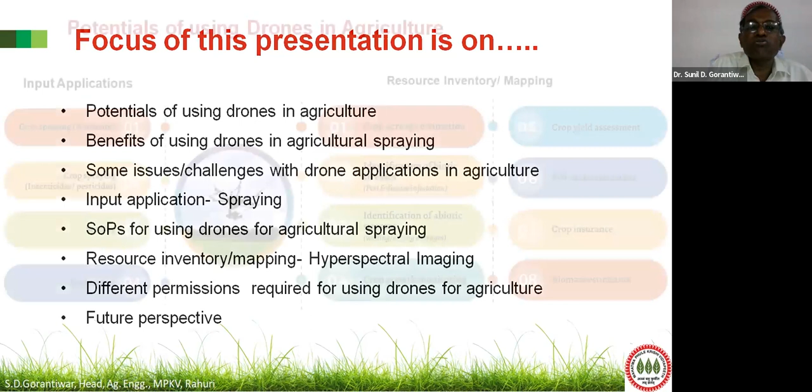Potentials of using drones in agriculture: as has already been pointed out by our founders, drones are being widely used in various sectors of development, and agriculture is no exception. Generally, whenever there is advanced technology, it is first used in other sectors, say transportation, navigation, or automobile industries, and agriculture is almost the last sector to adopt such applications. But in case of drones, we have started application in several sectors, and parallelly we have started applications of drones in agriculture.

This is primarily because of government encouragement and government initiatives for using drones in agriculture. There is one target set up by the government that maybe in the next 10 years, 2 lakh drones will be used for different operations in agriculture.

I have categorized the application of drones for agriculture into 2 kinds. One, we can apply several inputs with the help of drones in agriculture. And another application is we can make resource inventory and mapping by using drones in agriculture or farming.

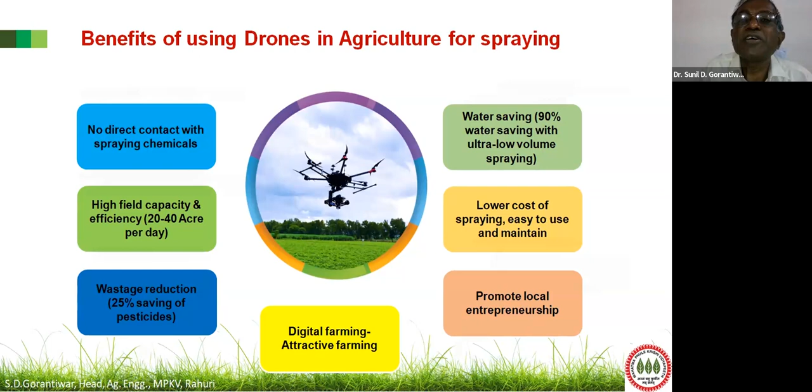So these are certain benefits of using drones for agriculture spraying, and agriculture spraying in general. But at the same time, there are certain limitations as well, because drone is a new technology. Whenever new technology comes into use for agriculture, there are several challenges, because agriculture is a very complex and heterogeneous system.

So it is not just like the industry system, which is governed by rules, but agriculture is very complex. The first limitation is flight time and range, because we have to use the drone in the rural area as far as its applications are concerned. Then its range could be a problem.

Flight time, in the sense that with the current level of technology and battery life, for spraying the drone can be in the air for about 10 minutes only. So we have to perform the operations within 10 minutes, then bring the drone down and change the batteries. So we have to do all these kinds of things. Currently there is this limitation, but now petrol operated and hybrid drones and some efficient battery systems are coming, and maybe this flight time can be increased.

But anyway, in one flight time of the battery, we can cover up to 2 acres of area, and farmers are satisfied with this. Life cycle of the battery is also currently an issue. With the current level of technology, the battery time is up to 20 to 30 minutes.

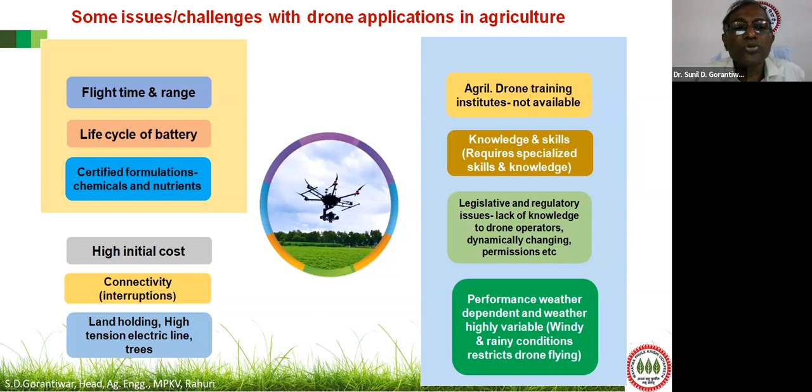Another thing is that weather could be an issue, because when spraying is concerned, we cannot use the drone in certain conditions. We have already prepared a standard operating procedure for guidance to farmers. We cannot use the drone all around the day because we cannot perform spraying in rainy conditions. At the same time, if there is high wind or high temperature, using the drone is also a limitation. But anyway, these are the issues and challenges, and we are in the process of addressing all of them.

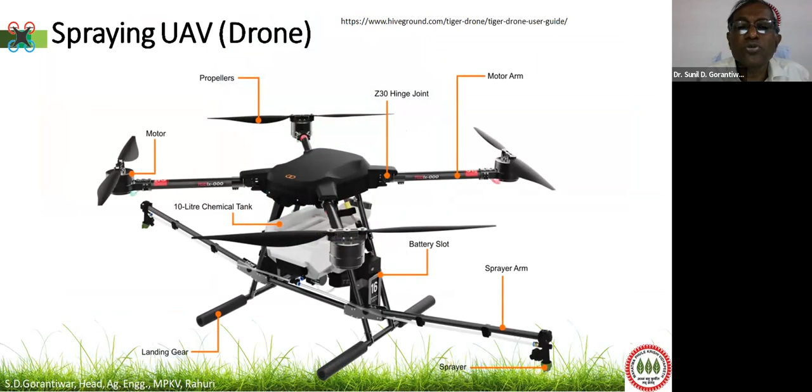As far as input application is concerned, for spraying we normally use this type of drone, which is a quadcopter or hexacopter, having a total load capacity of 25 kg. With this kind of drone, if we want to use it for agricultural spraying, there are 8 steps that we need to perform.

First, we need to calibrate for GPS, then do pre-flight checks, then flight planning. I have shown this pictorially as well here. GPS calibration, pre-flight checks, then we have to perform flight planning, that is mark the area and all those things. Then we have to fill the input, that is chemical and water.

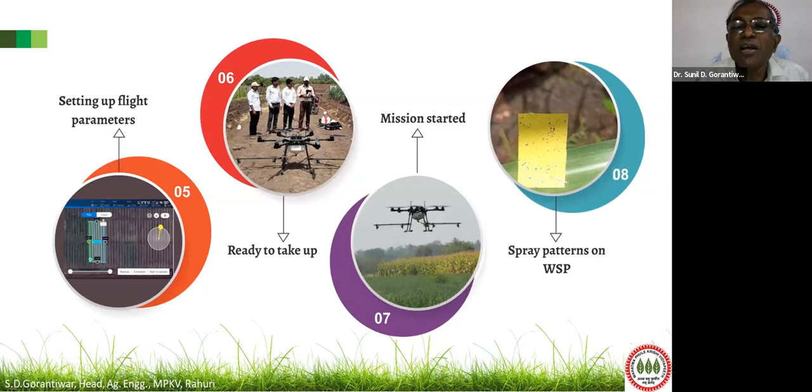Then setting up the flight parameters in the sense of drone speed, height of the drone above the canopy, and the swath width and all those things. Once this is done, the drone is ready to fly. After the spraying is over, if we want to measure the efficiency of the drone spraying, we can measure that by installing certain water sensitive papers and by doing certain operations.

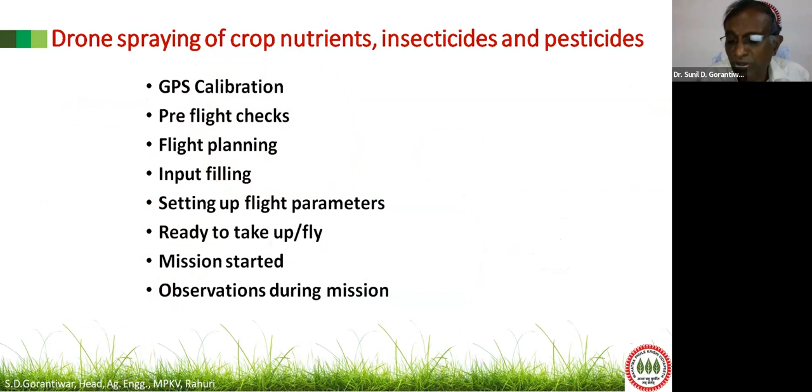So these are the 8 steps. Currently we find there are so many steps, but the experts don't really bother about this. Even if we do certain tractor operations, we have to perform these many steps. With the drone also we have to perform these, and though it appears something clumsy at this time, once the experts start using it, they become quite well conversant with it.

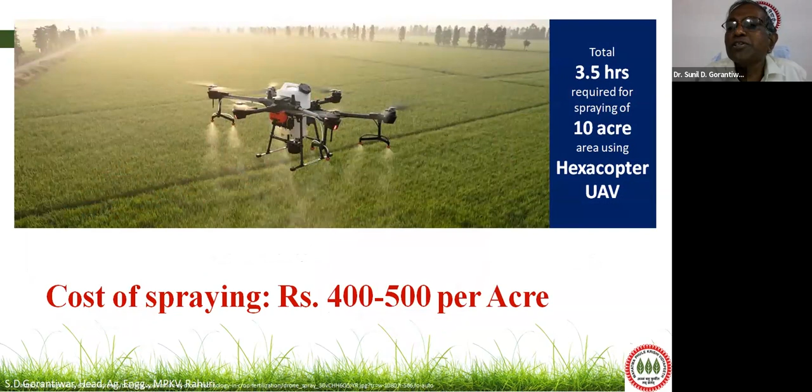With all these 8 operations together, we can cover up to 10 acres of the area in 3.5 hours. We have developed the protocol for this using a hexacopter drone, and the cost of this drone spraying comes to 400 to 500 rupees per acre.

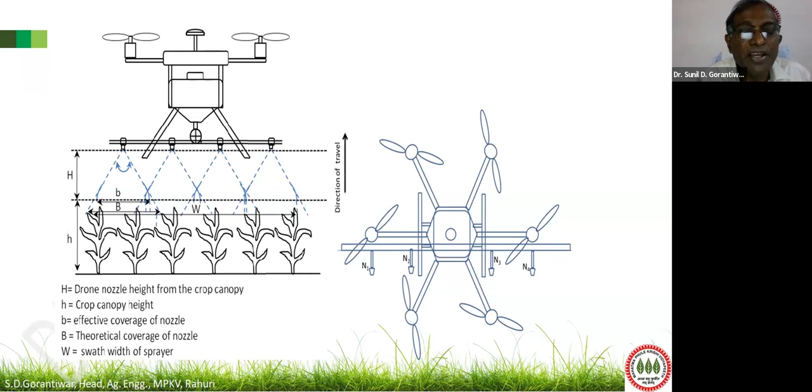Then there are certain drone spraying operating parameters. What should be the nozzle? What are the number of nozzles on the spraying boom? Where to mount them, whether below the motor or on the boom? All these things we have standardized, and based on this we have also developed the standard operating procedure, which involves the type of nozzles, number of nozzles, mounting of nozzles, discharge of nozzles, swath of flying, height of the drone above the crop canopy, and drone speed.

So a few of those drone operating parameters I have mentioned. The type of nozzles need to be anti-drift flat fan. The nozzle discharge should be in a range of 0.3 to 0.6 liter per minute. Nozzle angle 60 to 120. We have to use 2 to 3 kg per centimeter square pressure.

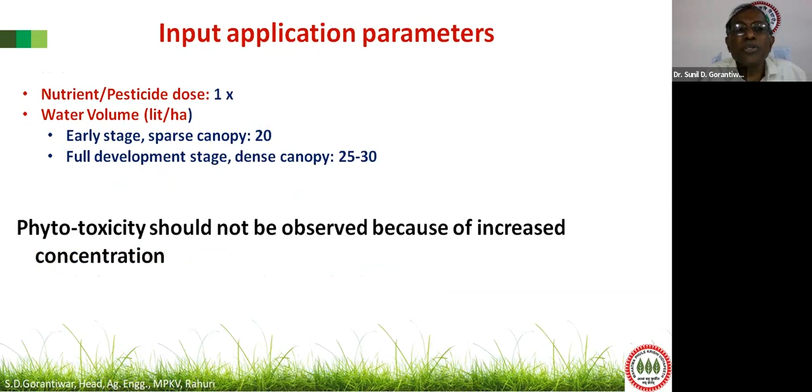Then, regarding water to be used: for early stage, we can use 20 liters of water per hectare. For development stage, we need to use 25 to 30 liters per hectare. So these are all the SOPs, which have already been published, but in summary I wanted to inform about these SOPs.

As far as environmental parameters are concerned, we advise that during summer season we should operate the drone from 6 a.m. to 10 a.m. and then during afternoon hours from 3 p.m. to 6 p.m., and during winter 8 to 11 and 2 p.m. to 5 p.m. So all those are standardized.

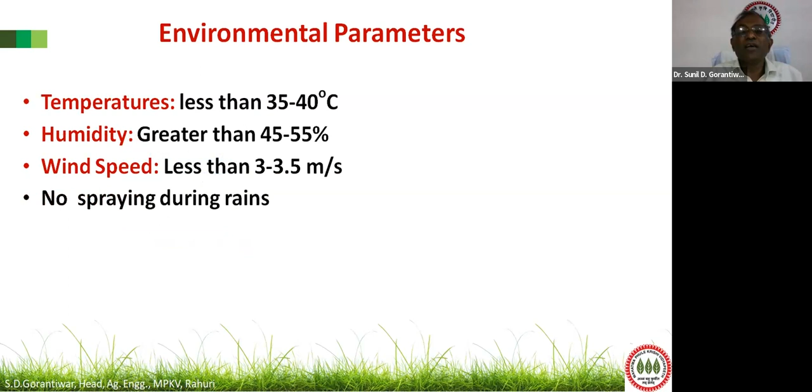Temperature should be in the range of 35 to 40, not more than that. Humidity should be greater than 45 to 55. Wind speed should be less than 3 to 3.5 meters per second. This is very important as far as efficient operations are concerned.

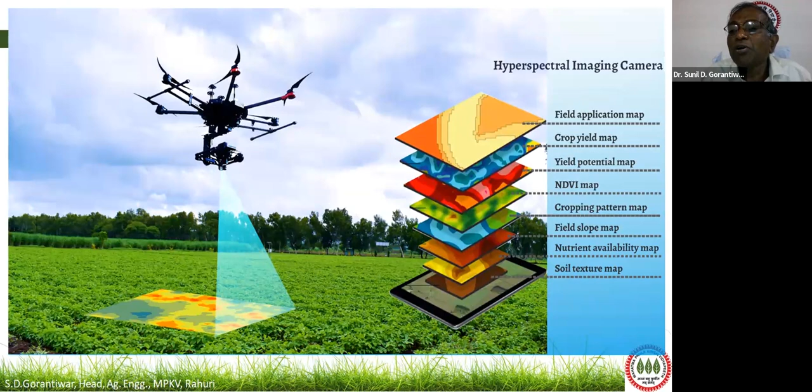Similarly, we can use the drone for different kinds of mapping, which I have indicated here: field application, crop yield, yield potential, NDVI, crop pattern, and all those things. These are the several kinds of cameras - thermal sensor, 3D LiDAR sensor, hyperspectral imaging sensor - that we can mount on the drone. Just as there were 8 steps for using drones for spraying, there are 10 steps for using drones for mapping: flight planning, setting up the flight.

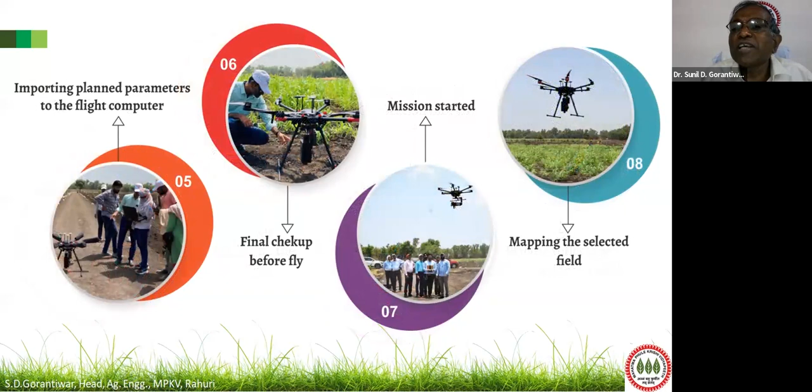Then we need the magnetometric calibration, placing a reflectance sheet, because whenever there is a camera, we have to have a certain target and reference. Then other flight parameters, which are similar, and after that we have to perform certain kinds of analysis once we get the drone image with the help of the drone. So these are, in short, the two applications.

Then we need several kinds of permissions for the drones. These are different for different types of drones: nano, micro, small, medium, and large.

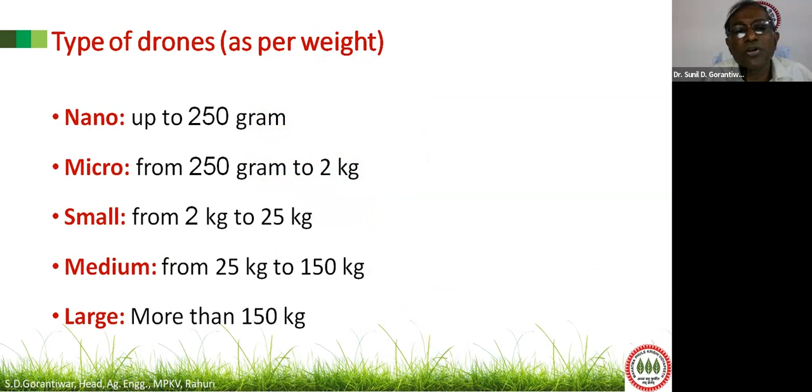As far as agriculture is concerned, we normally use small drones, having 2 kg to 25 kg weight. And for that, we have to ensure that we are operating the drone in the green zone or yellow zone with permission, which is available on the government's digital sky map.

That is available on the website. The drone should already have the type certificate by DGCA. Then the user should also obtain the unique identification number for the drone before flying. And the drone operator must have the drone flight license from the authorized RPTO, that is the Remote Pilot Training Organization, authorized by DGCA. So these are 4 kinds of permissions which we should know.

Mahatma Phule Krishi Vidyapeeth, Rahuri is the first agriculture university to be awarded with the Remote Pilot Training Organization status by DGCA. So we are continuously training farmers and participants on drone flying, and at the same time using drones for agriculture. We also provide guidance on how to obtain the type certificate, UIN, and how to locate whether your farm is in the green, yellow, or red zone.

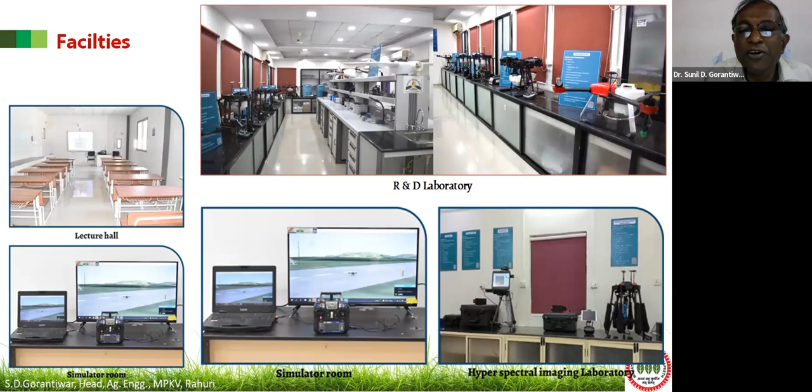I'll skip these slides, there are procedures for this purpose. We have facilities, as already told by our founders, of 38 different kinds of drones for spraying, and we have simulators and other things to provide training for the drone pilots.

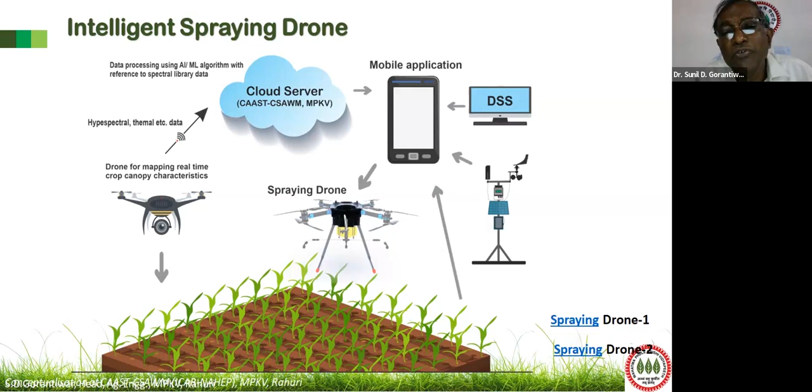Besides this, we can use drones for several purposes like mapping, and we are trying to develop AI-based systems wherein we can map soil fertility and biotic and abiotic stresses with the help of drones. Based on this, we can prepare a prescription map for the field and decide the inputs to be applied. There could be one mapping drone, one input application drone, or an integrated system where mapping and input application are done by the same drone. We are also working on this.

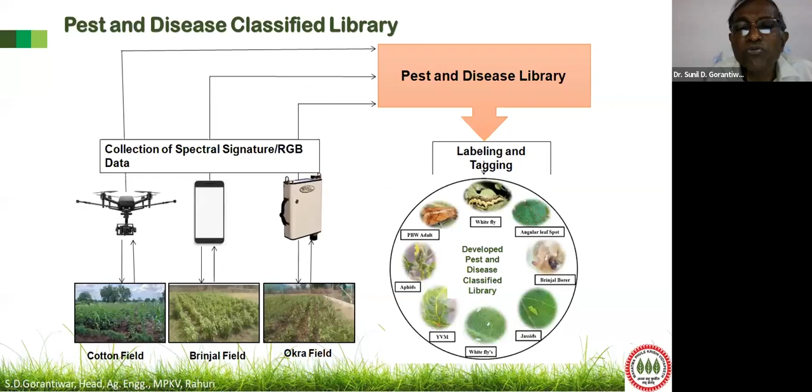We are also working on a real-time irrigation management system using drones for the canal command area. We can also connect the drone with the tractor so that the drone can prescribe the inputs to be applied, and the tractor can apply them at a variable rate. Similarly, a real-time pest and disease identification system is also one of the future perspectives, and a few things are already going on in this regard.

So I think with this I would like to stop, my time is up, probably I've taken 5 minutes or more. Sorry for this, but I would like to thank profusely the organizers, SAPI, for giving me the opportunity to brief a few things about drone applications in agriculture. It is quite a vast and emerging subject. If there are certain issues or difficulties, I'm very happy to discuss or interact with you anytime.

Thank you very much, Professor Gorantiwar, for this very good presentation, which is elaborately explained. I think very few of us have a direct concern or relation with agriculture, and this must have been a good, insightful presentation to us to know how technology is being used in agriculture.

You have mentioned the mapping systems for the role of the drone as well as spraying, and also what future applications should happen. Good food for thought for all the participants of this webinar. Not only them, YouTube will spread this knowledge far and wide. Your idea of using it in hyperspectral farming is very wonderful, because India has to produce more in the same acreage due to the growing population. As of today, we are the highest population nation in the world, with less land available to us. The only solution is to increase the productivity of the existing land available.

Now coming to the characteristics of military drones - what is a drone? Unmanned aerial vehicles are commonly called drones. They are like aircraft but remotely controlled by an operator on the ground. They can be fixed wing or rotary. So like you have fixed wing aircraft or helicopters, these can also be fixed wing, like an airplane, or rotary, like a quadcopter or hexacopter.

Most drones are fitted with sensors and cameras to gather intelligence and conduct recce missions. This used to be the initial stage where we did not fit any weapon system on drones. But today, drones are equipped with a wide range of weapons, including missiles, bombs, and machine guns, for conducting targeted strikes against the enemy.

Drones have very little radar cross-section, so they're very difficult to detect by radars. Now millimetric wave radars are under production, which can detect these to some extent, and there are various methods to detect them. But most countries do not have this kind of technology, so that's why drones are still very effective in warfare.

Moreover, they can fly at altitudes making them more difficult to detect and intercept. Drones can fly for extended periods without the need for refueling, allowing them to conduct long-range missions. The Bayraktar of Turkey can fly for 24 hours without refueling.

When I say refueling, they don't have to come down, and for 24 hours they can be in the sky. Similarly, the Shahed of Iran can fly for more than 48 hours.

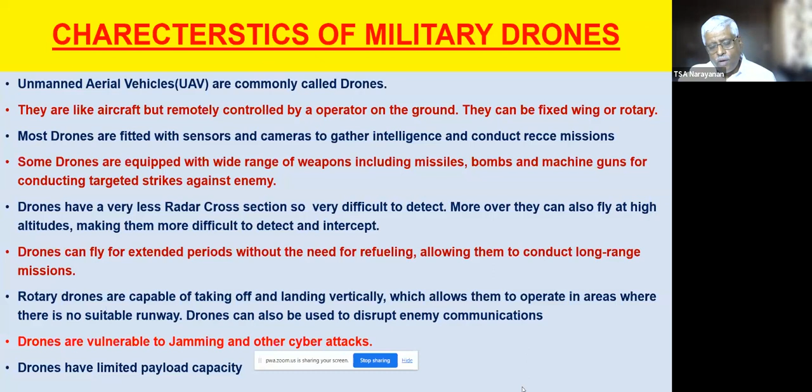So reconnaissance - drone-equipped cameras and sensors can provide real-time intelligence and surveillance to infantry units. A problem for infantry is what is behind the mountain - now that can be seen. So situational awareness can be given to infantry.

It can be used for targeting, to guide precision airstrikes or even artillery fire onto enemy targets. Resupply of ammunition, or any supply or medical equipment, can be done where a soldier cannot reach - you can send it through drones. Of course, to extend communication, drones could also be used as a relay station, and it can extend the communication. Now these are not the only four.

Similarly, when I talk about others, they're not limited to this either. A commander, based on his knowledge and requirement, can use these drones for innumerable tasks, and they have been done recently also.

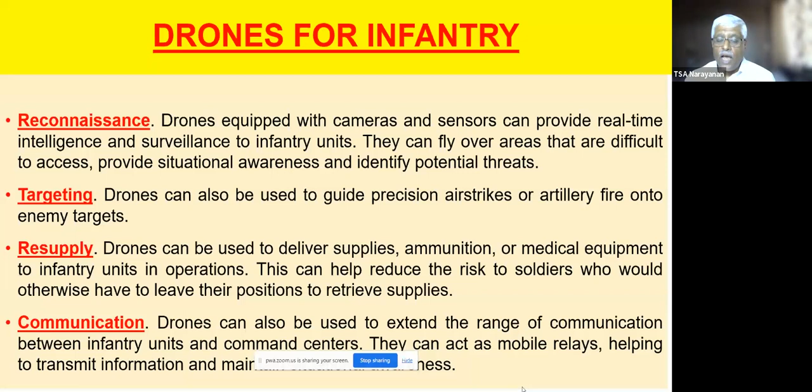Coming to artillery - for target acquisition, they can do that. For artillery fire adjustment, feedback is provided through the drones to the unit doing the firing, to see where the ammunition is landing, and they can correct it. Once they have fired and destroyed the enemy, battle damage assessment can also be done. And these drones can also be used by artillery for their own logistics, to get supplies or ammunition.

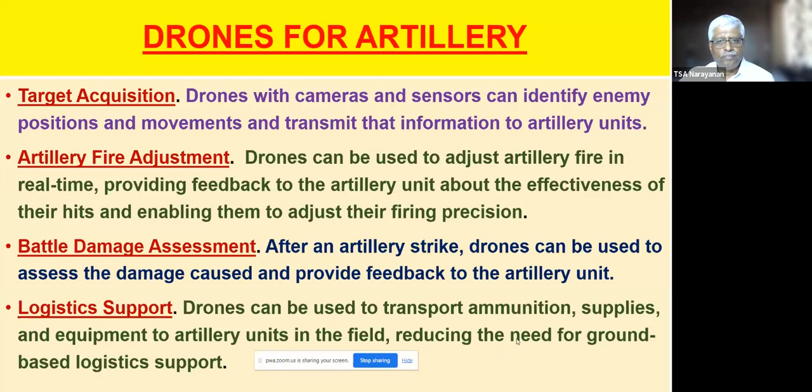Mechanized forces, which includes the armored corps and the mechanized infantry - basically the tank people and the BMP people, I'll call it, to understand at a basic level. Again, reconnaissance - now what is very difficult to find out? That also can be found out using drones.

Plus, you can tie a drone, called a tethered drone, to a tank or a BMP, and take it 100 meters away, 100 meters in height, and now look into enemy territory to 6 to 7 kilometers. The drone continuously gets powered through the tank or the BMP, so it can stay in the sky for a very, very long time.

Target acquisition is another thing which can be done. Force protection - the problem is when mechanized forces move, there are mobile teams put by the enemy to target and delay these forces. So drones can go ahead and find out about these hard-hitting mobile teams and missile teams and can neutralize them, or even provide information so that subsequently the infantry or other teams can go and neutralize them.

Logistic support, again same for everyone - it can provide supplies, ammunition, and other equipment. Communication can act as a mobile relay.

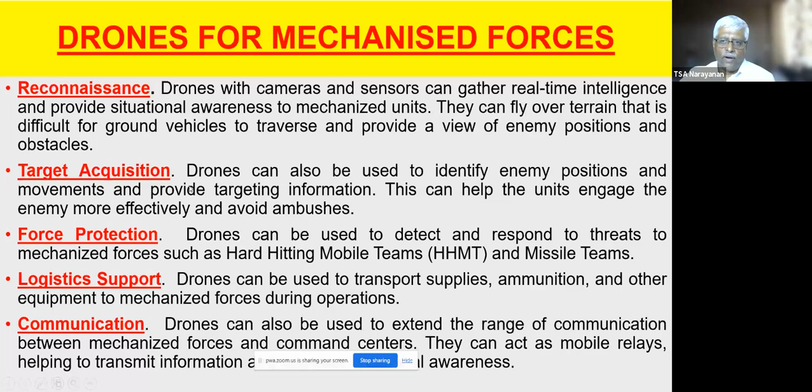Combat engineers, same as reconnaissance, but here the reconnaissance is like to identify obstacles or detect enemy positions, and whatever the engineers require, that data can be provided through drones for them to make a breach or even to lay mines or whatever requirement.

Mapping and surveying is another thing these drones can be used for. Even Professor Gorantiwar said about mapping - here also they can be used for mapping, which will provide high resolution imagery.

Demolition of bridges and other things which the engineers have to take on as demolition tasks - that can also be done using drones, or even to clear obstacles. Construction support - drones can be used to transport construction material and equipment to remote or hard to reach locations.

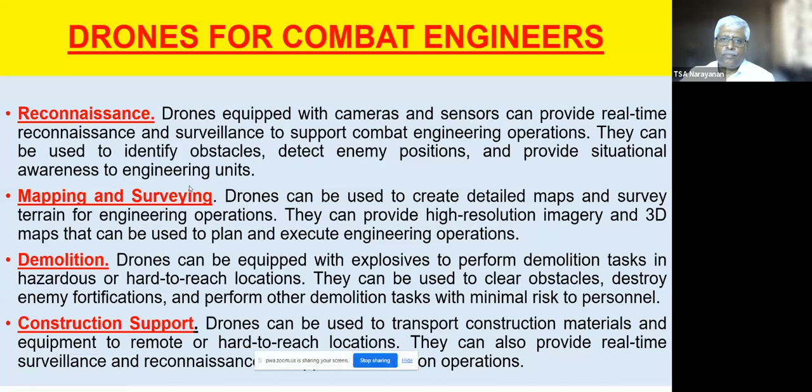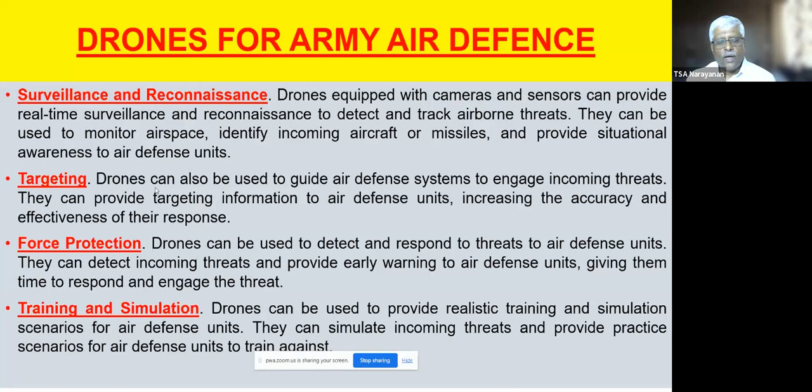Training and simulation - the drones can actually provide realistic training and simulation for air defense units. They can simulate incoming threats and provide practice scenarios for air defense.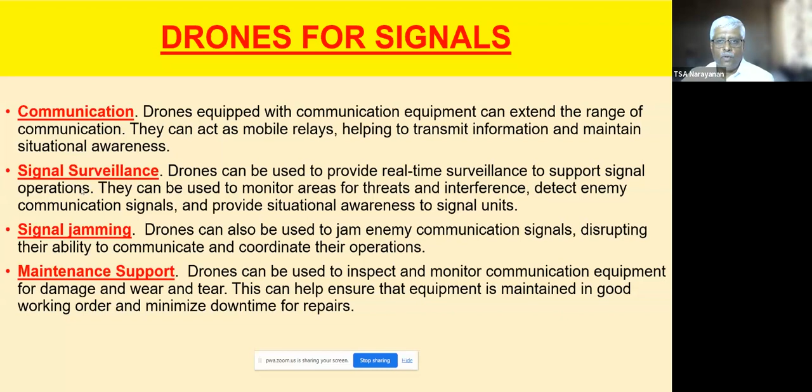And of course, for maintenance support also it can be placed. Logistics, as we discussed - transportation, it can be used for any material, surveillance and recce for the logistic purpose.

Even when logistics units move, there should not be any hard-hitting teams of the enemy targeting them, because logistics are not very well protected. If they cannot hold them, they have to move fast so that supply reaches the forward troops at the earliest. So it is possible that the enemy can put hard-hitting teams in between to take on the logistics and delay the move. So these drones could be utilized for that also.

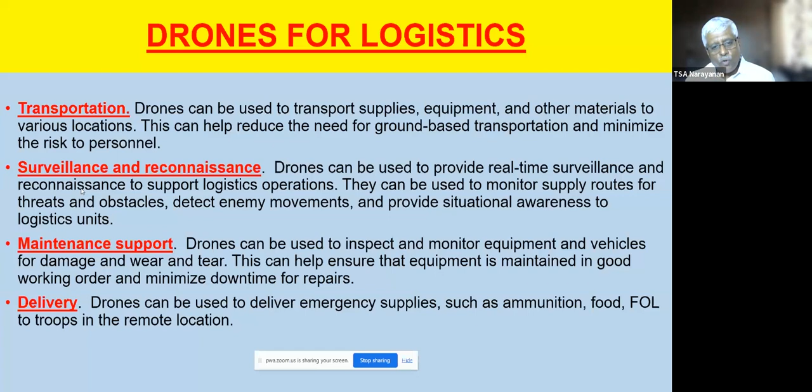Maintenance support is one, and delivery of all emergent supplies, ammunition, and everything. For maintenance people - I am from Corps of EME, we are the maintenance people.

It can be used for inspection of equipment for damage, wear and tear, by providing high resolution imagery and detailed information about the condition of the equipment. Very important - otherwise we have to always send a team to inspect and see the condition of the equipment.

It can be used for monitoring equipment and changes in conditions. It can be used to carry tools and equipment to support maintenance operations - they can carry spare parts, tools. And if you get heavier drones, you should be able to carry engines and other things also, and this will make the maintenance much faster.

Drones can also be fitted with robotic arms or other tools to perform maintenance tasks on equipment or vehicles, so remote operations can also be possible.

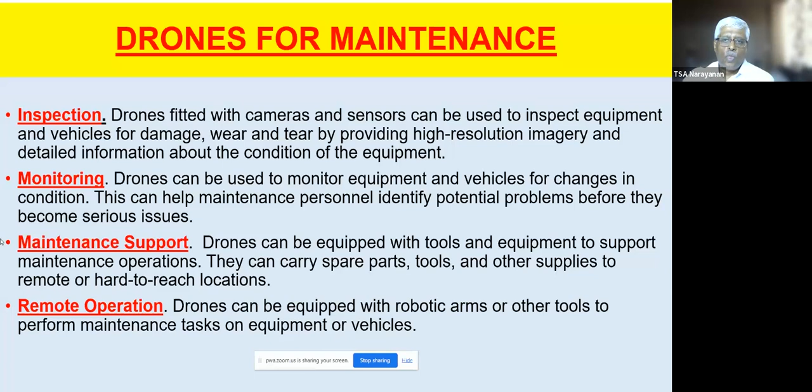Medical - as you are all aware, medical supplies delivery can be done. It could be blood, vaccine, medicine, or anything. Drones are being utilized in the civil sector also for large number of medical purposes, especially if there's an earthquake, an avalanche or anything - large numbers of medical equipment are transported using drones.

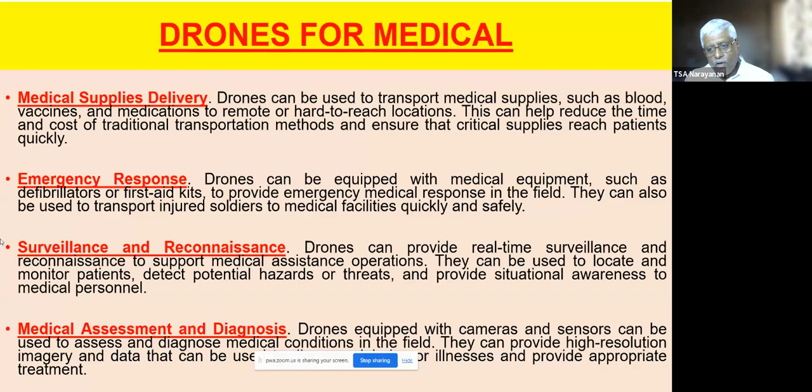For emergency response, it could be for any emergency, earthquake, avalanche, anything, or an ambush on an army convoy. We can use drones for ensuring that this medical kit reaches at the earliest. Surveillance and recce for medical purpose, and for diagnosis, using cameras and sensors to diagnose the condition of the man in the field, so that they can send the imagery and the doctor can say what kind of support is needed.

Now we will talk about loitering ammunition. What is loitering ammunition? It is also a sort of UAV that combines the characteristics of a guided missile and a drone. There has to be a difference between a drone and a guided missile. A drone, also called a kamikaze drone, is a loitering ammunition. What is kamikaze? It's a Japanese term from the Second World War, where they would fill an aeroplane with a large amount of ammunition and destroy a ship by striking the plane against it. So it's a suicide mission - that's how it's called kamikaze. These kamikaze drones are also called loitering ammunition.

The difference between them and a guided missile is, once a guided missile is fired, you cannot retrieve it back. You have to either destroy it while it's in flight, or it will go and destroy whatever the mission target was. Whereas the loitering ammunition can be called back safely, and the mission can be aborted. So that is the biggest advantage.

These are autonomous systems that loiter over a specific area, search for a target, and once the target is identified, the loitering ammunition attacks and destroys it either by diving into the target or by detonating an explosive payload over it. They are small, lightweight, and portable, allowing them to be launched from ground-based or airborne platforms such as aircraft, helicopter, or even ground vehicles. They're also equipped, like drones, with a variety of sensors to detect and track targets. The biggest advantage of loitering ammunition is its ability to provide military forces with a new form of precision strike capability that can neutralize enemy targets with minimum collateral damage. That last point is very important - minimum collateral damage.

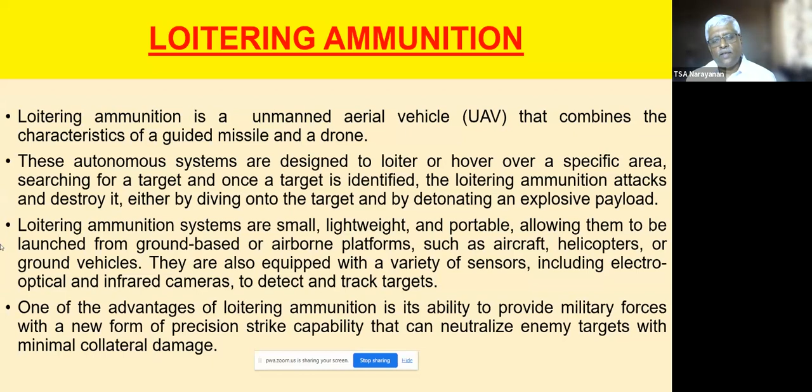So this is a precision target it can take on, and it will loiter in the sky until it finds its target. The moment it finds the target, it goes and hits it. So what is the difference between loitering ammunition and a combat drone? That is very important to understand. In three columns I have tried to explain: first is the criteria, second is loitering ammunition, and third is combat drone.

First is the purpose. Loitering ammunition is to engage and attack stationary or moving targets. Whereas combat drones provide real-time situational awareness, conduct surveillance, gather intelligence, and engage and attack targets. So combat drones, when they engage an attack target, need not destroy themselves - they have missiles or bombs fitted on them for attacking and engaging targets.

Flight time of loitering ammunition is up to several hours - it is supposed to last a long time because it needs to hover until it detects a target. Whereas in combat drones, the mission is already pre-planned, so the flight time is shorter, typically an hour or two maximum.

Launch and control: loitering ammunition can be launched by an individual soldier and controlled remotely. Whereas combat drones are launched from a base, or could be from a ship or anywhere, but can also be controlled remotely. Target acquisition is generally the same for both. Attack method is generally the same, but loitering ammunition will explode, whereas combat drones may explode, may not explode, or may drop a bomb. Payload: loitering ammunition has explosive, lethal payload, whereas combat drones have explosive or non-lethal payloads also.

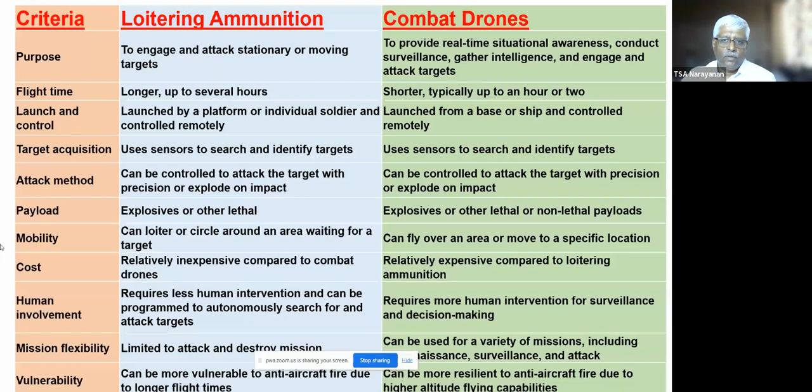After having seen the difference, now let us look at what is a swarm of drones. I would like to tell you about swarm of drones because, as Dr. Pradeep Gupta said, we had actually, along with a startup, NewSpace Research and Technologies of Bangalore, the Simulator Development Division had demonstrated the first offensive swarm of drones during the January '21 Army Day Parade. This was to give exposure to senior army officers on what a swarm drone is and what its capabilities are. Based on this, a large number of swarm drone procurement orders have already been issued by Army Headquarters, and some swarm drones have already been inducted into our army.

Now, what are swarm drones? Swarming is characterized by the collective behavior of multiple agents, for agents read drones, working towards achieving a common objective. So a large number of drones having a common objective and a collective behavior.

If you look at it, one end of the swarming spectrum involves multiple agents maneuvering in space to form a cohesive group while navigating to a specific location, moving together. But at the other end of the spectrum, they have to collaborate with each other. They should have intelligent behavior and be able to interact with each other so that whatever problems arise, they are able to solve them in a dynamic environment. This is what actually makes a swarm drone.

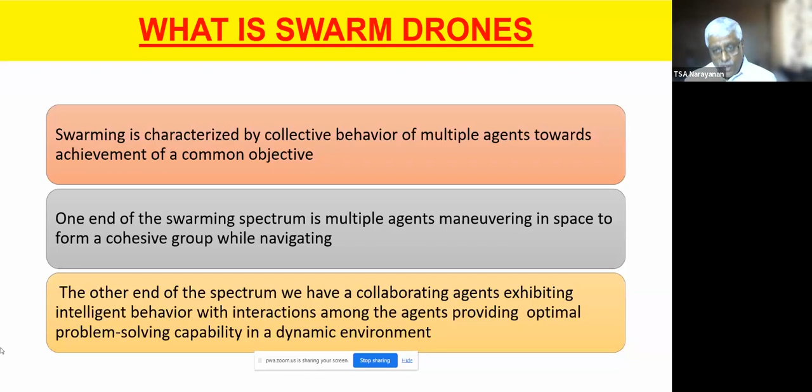Now, you would have seen large number of drone shows. At any big event, a drone show takes place, and we see large numbers of drones doing some miraculous things, some show off. Now, what is the difference between a military swarm and a drone show? When it comes to military swarm, the human on the loop is optional. You can launch the military swarm and it can go up to the objective, do its work, and come back without human intervention. Whereas in a drone show, the complete show is centrally controlled by humans.

Now, when it comes to space and time, for military swarms it is onboard — spatially and in time, the drones move based on the onboard processing available. Whereas in a drone show, it has onboard processing, but every movement is pre-planned. Similarly, swarm intelligence is not required in a drone show, whereas it is required for a military swarm. When it comes to autonomy, military swarms are fully autonomous, whereas drone shows are pre-planned. AI may or may not be there in a drone show, but it is required in a military swarm, and edge computing means every drone will have its own edge computing. In military swarms, collaboration is through networking, whereas the drones used in a drone show may not be networked.

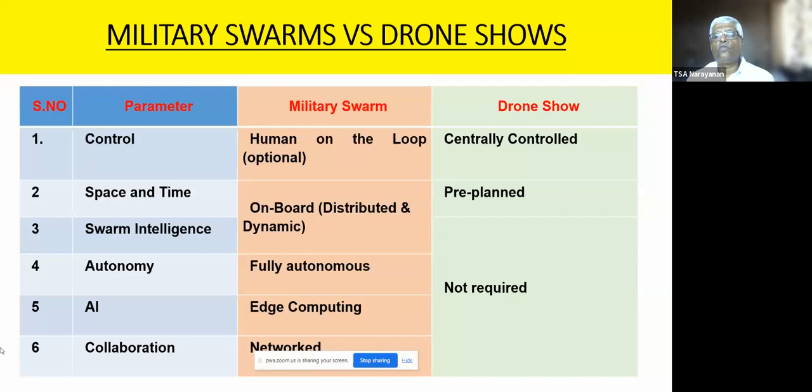Now, military swarms use distributed intelligence. Distributed intelligence is preferred in military swarm, where every agent or drone has identical computational resources, that is, the hardware and software. They have to have built-in redundancy, where the surviving members keep collaborating as a swarm for mission continuation, thus bringing in robustness. As they keep moving, the collaboration has to continue. The individual drones need to be aware of the overall mission progress — every drone should know what the mission is and what progress is being made — be capable of collecting and assimilating awareness of their local surroundings, including other drones, and finally be capable of collaborating with the surviving swarm to achieve the mission objective.

When you say the surviving swarm, it is possible that some of the drones, when moving as a swarm, get destroyed. So the remaining drones have to collaborate with each other so that they are able to achieve the mission objective.

Such a collaborating agent will at times face a situation where, for the sake of swarm survivability, it has to select a particular operation maneuver over another which may be conflicting at that time. That is why the decision AI has been given, so it can take a decision. So the priority of individual agents is first that it has to survive on its own, then it has to collaborate and have cohesion with other swarms, and third and final, it should be able to update the mission parameters.

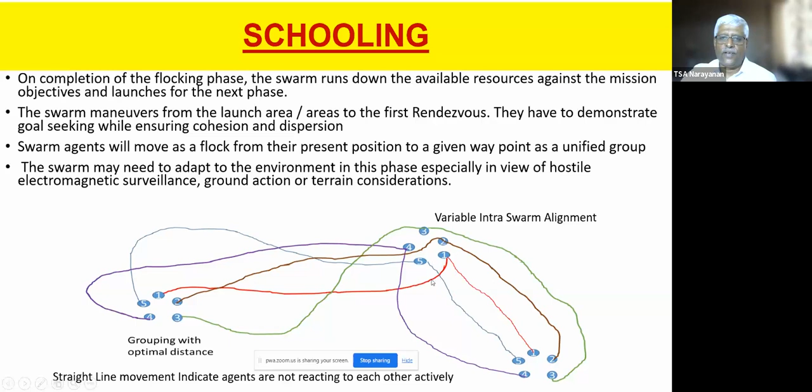Coming to foraging. Foraging is the target area. Now, once the swarm reaches the target area, it has to operate with the elasticity to map the area of interest to sift out the target of interest.